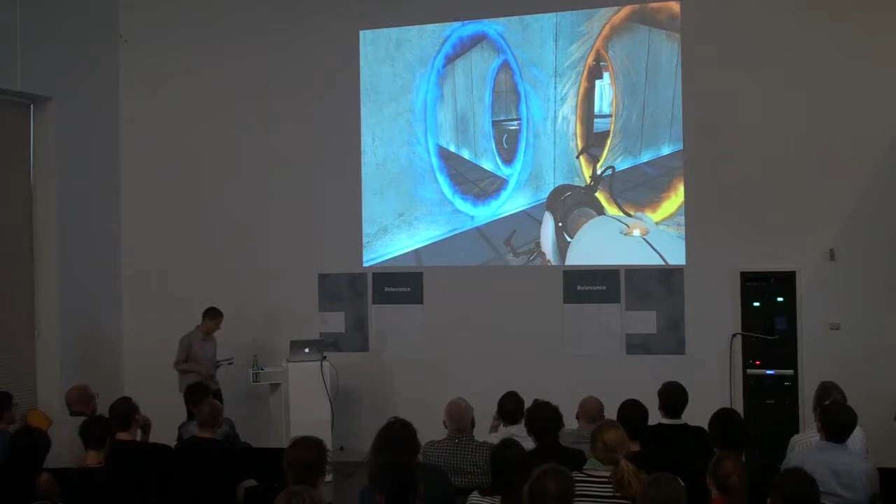An early piece that played with this possibility was developed in 2008 at the Mattress Factory. The project used William Warren's dynamic, or idea of what he termed the wormhole, as a way of thinking about spatial navigation.

So to simplify this conversation, let's say you are starting in this box here, and you are walking from this point around this long distance to this point down here. Because it takes a certain duration to move from point A to point B, you imagine there's a certain distance that your body has to travel between the two points. But if you create a kind of visual shortcut from point A to point B, you suddenly have a collapse of these relationships, where these things start to coexist in the same field.

This becomes ever more disorienting, or more complex, perhaps, when we start thinking about the relationship from what is above us to what is below.

Here we have an image of the work. When you enter the space, you see the piece embedded in the floor. And when you get closer to the piece, you start to actually feel the air that is coming from the exterior entering into the space.

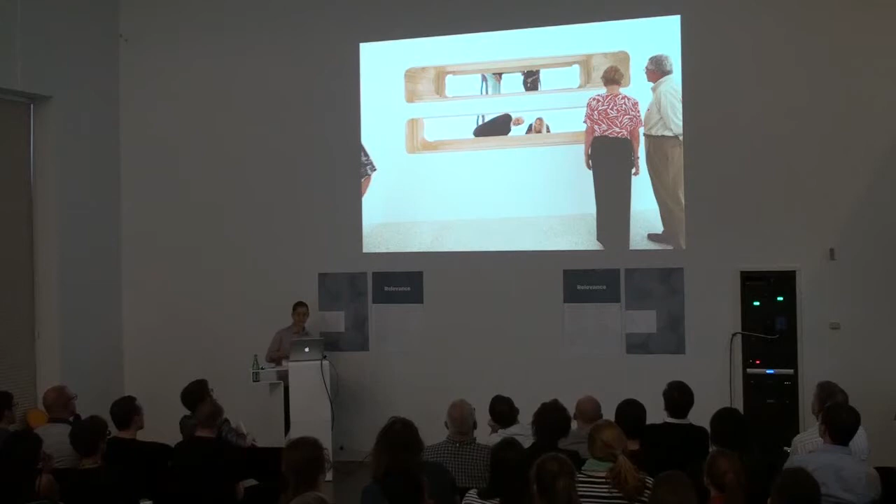But as either you, the viewer, or the object you are viewing, meaning the bodies on the far side of the wall, get closer to the boundary plane, the inversion becomes more apparent. So here you see the upper body below the lower body. And this is the work from the opposite side.

The AB condition can be expanded, or perhaps we could think of this thickness as now becoming a kind of inhabitable space, so that rather than simply looking through or across this border plane, one can now reside within it.

Here we have a project where that AB condition is transformed into an ABC condition, where now a viewer stands on one side of the boundary and on a far side of the boundary and gazes through the floor plane of a small room above, or the viewer stands and looks through reflected, across two reflected surfaces into the small space above.

Here we have the entry into the upper room, and here we have the front wall surface. Here we have the upper space, space C, looking out over a field of white walls.

And here we have the view from the ground plane, where you are standing in the space looking through the floor plane of the people above, and here you are seeing the people standing in the space above.

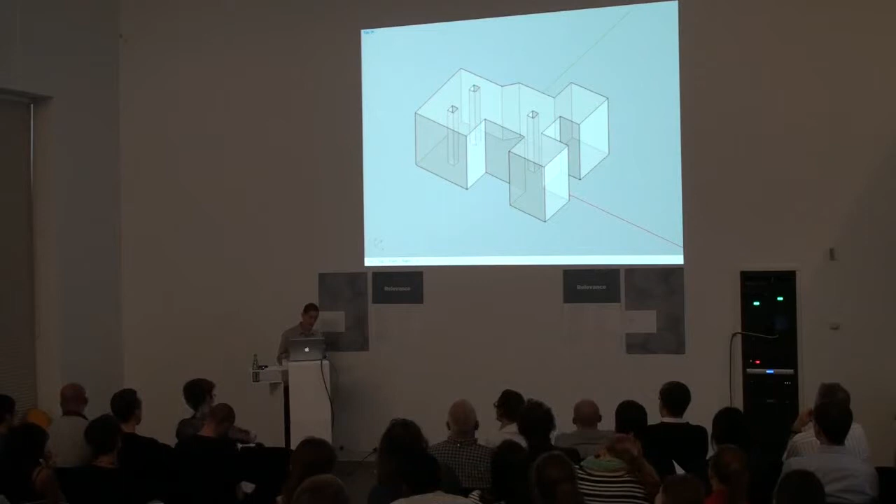So, for example, the location of a light source can be dependent on the time of day, or as in the case of the isovist, the volume of the isovist is dependent on the relationship between the total architectural volume and the position of the viewer. The software automatically updates the isovist in real time as a point is moved around the space.

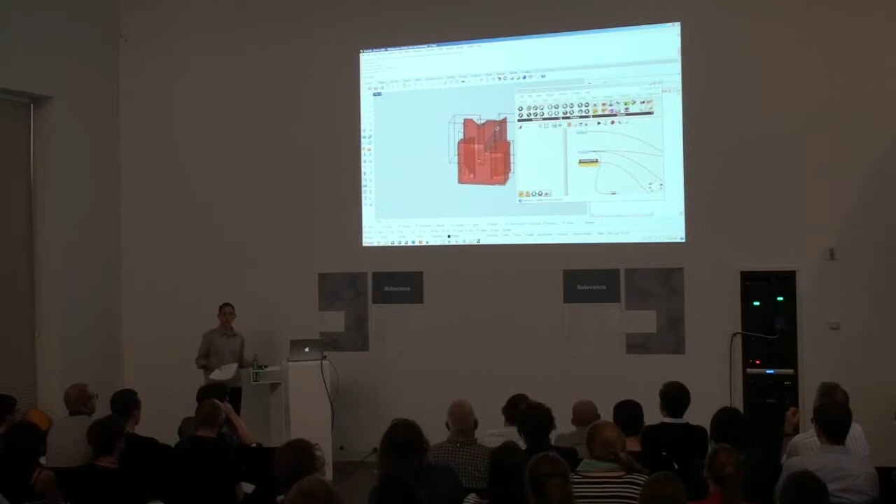Here is an example of how that works. In this very simple model, we have a fully enclosed volume where a single point represents the point of the viewer. If you input that point into the model, you can then actually generate the isovist from that given point, and observe that volumetric space. As you move that viewer around within your model space, you can start to perceive how that isovist volume would change as the viewer proceeds through the location.

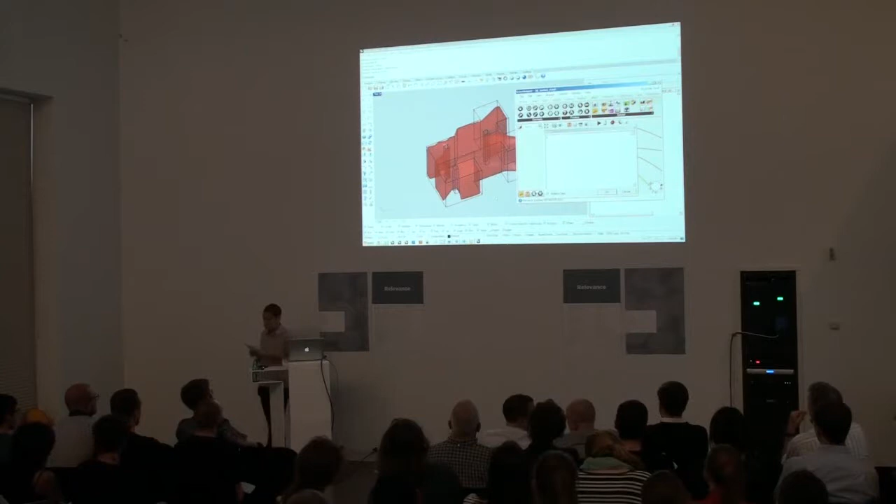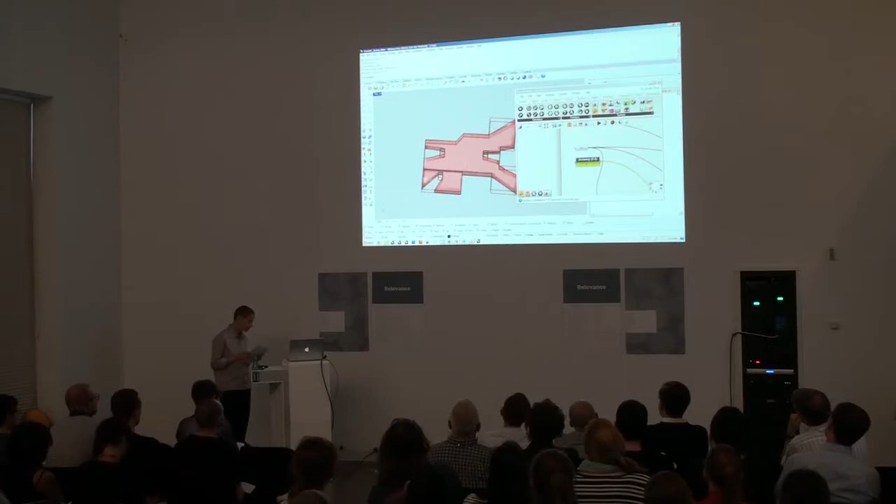The possibility of encoding perceptual cues within a parametric model recalls debates in contemporary art extending from the late 1960s to today. In 1968, two significant exhibitions, one at the Stedelijk in Amsterdam and the second at Kunsthalle Bern, argued for the centrality of site in shaping a work's form.

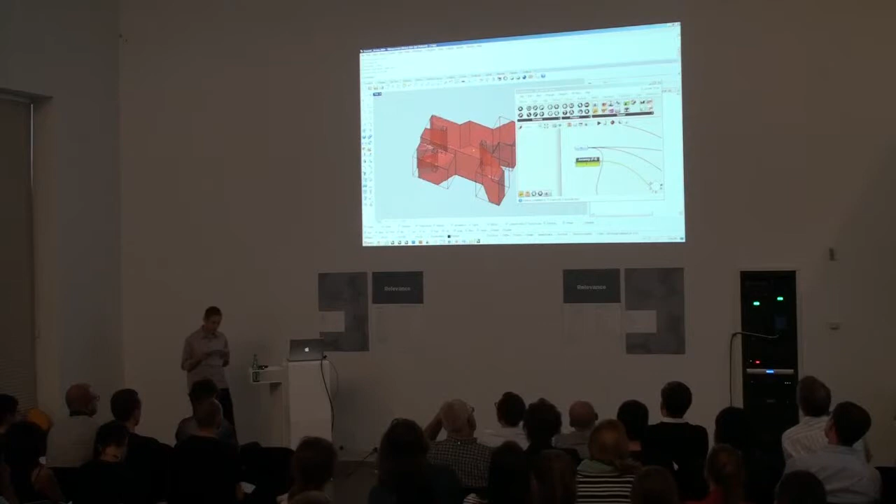Describing the work in Op Losse Schroeven at the Stedelijk, curator Wim Beeren argues that the work has changed from, quote, an artwork that dominates and determines the space to an art that takes up a certain relationship to the space, end quote. The shape and form of the works in the exhibition were dependent on context. When works were reinstalled in a new location, the form of the work was altered. Site was a non-transferable, specific set of sensible conditions that shapes an artwork's form.

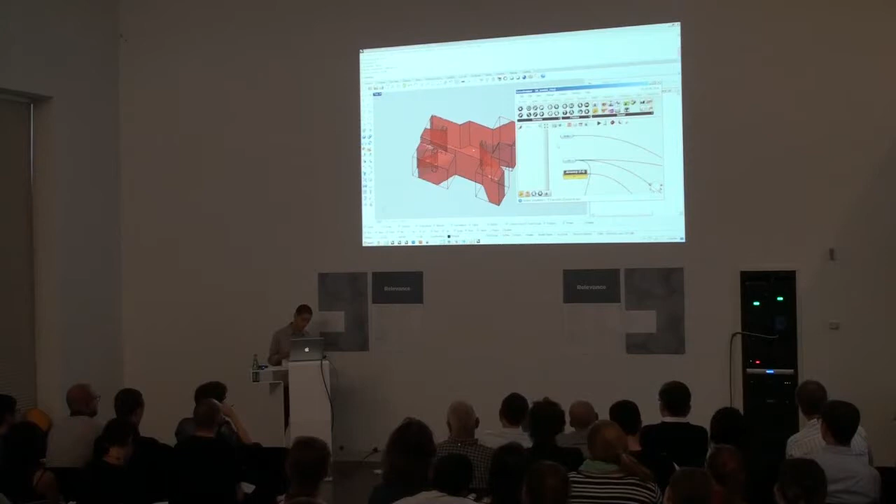Scripting universalizes these sensible conditions, assigning numerical value to a location's changing qualities. Properties of sunlight, moisture, condensation, temperature, vibration, reflection, etc. are transformed from sensible affect to quantifiable variable. This transformation actively argues against the ongoing presumption that the sensibility of sight can unmoor the artwork from predictable arrangement.

The isovist was used as a way of starting to think about how to contend with the irregularity of this location. In particular, a major challenge to the construction of, or the stability of the form of the isovist as the viewer moves through the space, was this column right here.

The resolution of this irregularity came in the form of extending the grid so that the columns were buried within the walls, or within a single new wall, and a new zone was generated. So now we have an A, B, C, D, E, F zone, and the columns are located not where one might expect them, which is at the intersection of these two walls, but in fact off-center.

This meant that the corner spaces were not filled with structural material, so those corners could be excavated or opened up, and that opening would create a kind of irregular void space.

It also became very important to understand these zones not purely in terms of what is visible and what is not visible, or the possibility of the occluding edge, but also in terms of zones of light and dark, or the color or temperature of white light.

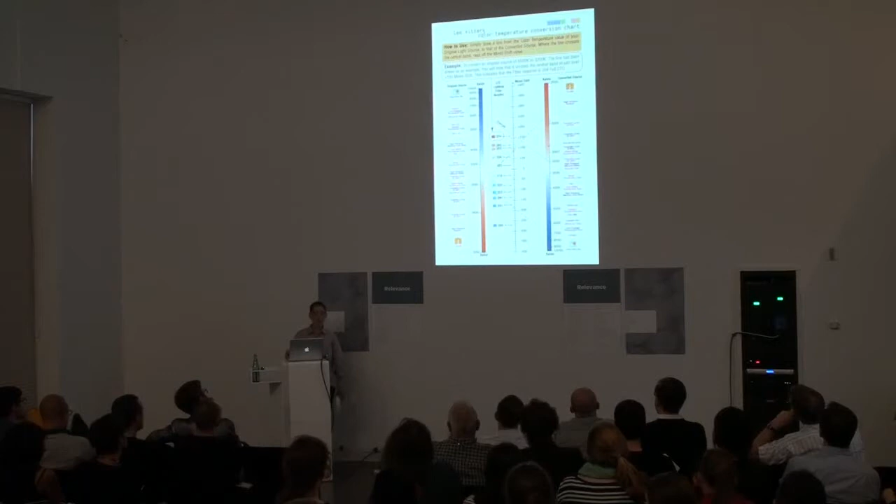In order to study the models, or the changing warm and cool white light as it passed across this model space, we did a series of tests. These tests required not a Rhino-based model or a render engine model, but an actual physical light condition where the Kelvin values were set up in various ways.

So here we have these different gels along an A, B, C, D, E, F space. And here we have a series of models where you can see we were basically moving gels around and thinking about how different warm and cool white light shifts might have a resonant effect. This is a photograph of that model.

The other important development through this process was the specific connection and thickness of the material. One very critical aspect was how to create a surface that lined the incision across the thickness of the material that was not seamless, but actually articulated the seam, while maintaining the collapse or absorption of light so that when perceived from a distance, it would appear incredibly flat, with a great reduction of depth perception.

So we developed a script that allowed for a joint based on a wood lap joint. That script started as a series of possible joint sketches, and then led to a basic parametric model that allowed for a series of variables which determine this joint system.

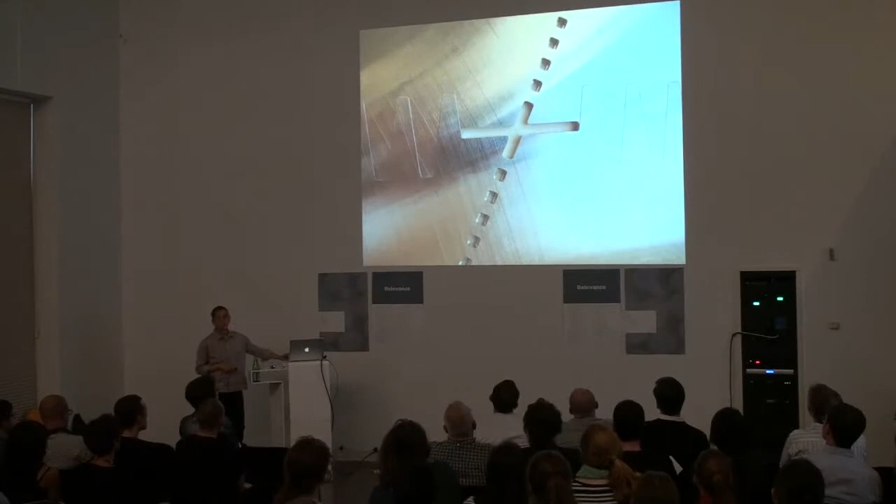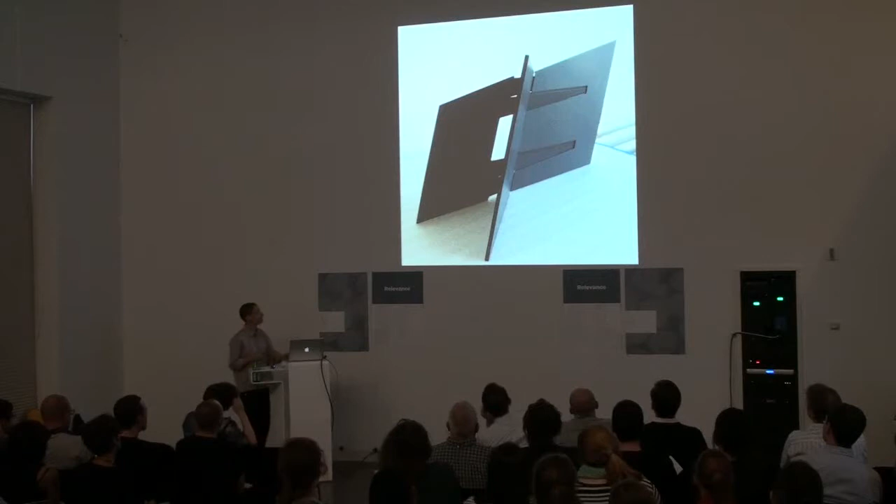This is a sample of this early version of this material. And this is another sample using the same definition. And this is a three-way joint where we have specifically a bent piece of material and an elongated tooth or lap joint across that material, creating a three-way intersection. And this is the location of that detail in the larger project.

This is the ABCD condition. You enter the space from this particular room, and what appears to be quite blue in this room and yellow in this room is actually not blue or yellow. The way the photograph was structured was that the neutral grade was set in each of these photographs to the room in which the photograph was taken. So everything is a kind of relative warmth or coolness.

This blue color is daylight. This warm color, I believe, is 4100 K. You enter the space, you walk through this threshold, looking into a storage room which has a 6,000 Kelvin value fluorescent bulb into the space to the right. You look back out the window in the far space beyond.

And here you're standing in the daylit room looking back into a fluorescent lit room, which is not actually a deep yellow, but appears yellow when you key the photograph to a color neutral. The other thing that became very important as a result of this project was the relationship of this large plane of glass to the floor, and specifically the fact that the glass floated above the floor plane and created a kind of tension between this edge and the ground plane.

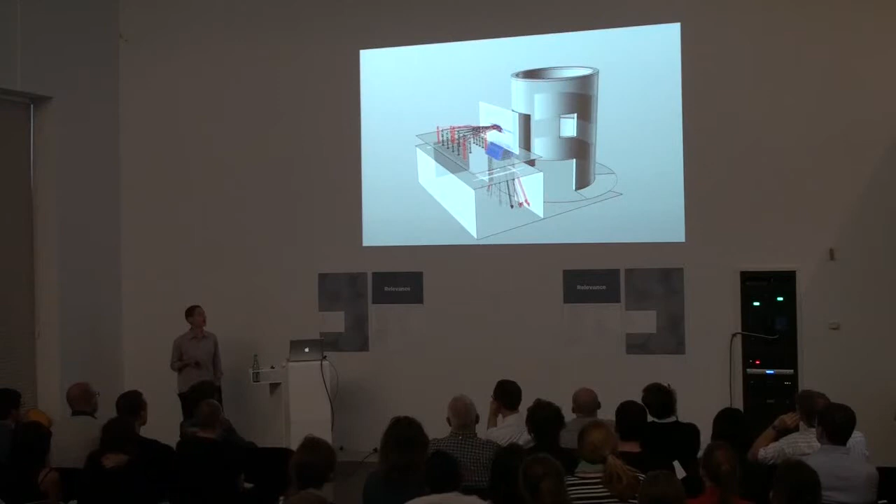In developing this work, a series of studies were done on the possibility of viewing across a reflective surface within the thickness of this wall and down through to the floor below. What you have here is a very simple diagram showing one of the great challenges of this work.

So all of these figures in red, all the sightlines in red, are viewing an obstruction. Specifically, as they look at this mirror plane, the sightlines are not actually passing through the hole in the slab, but because of the depth of that slab, they're intersecting with the walls or the thickness of the slab itself. So there's a lot of reflection of the actual structure.

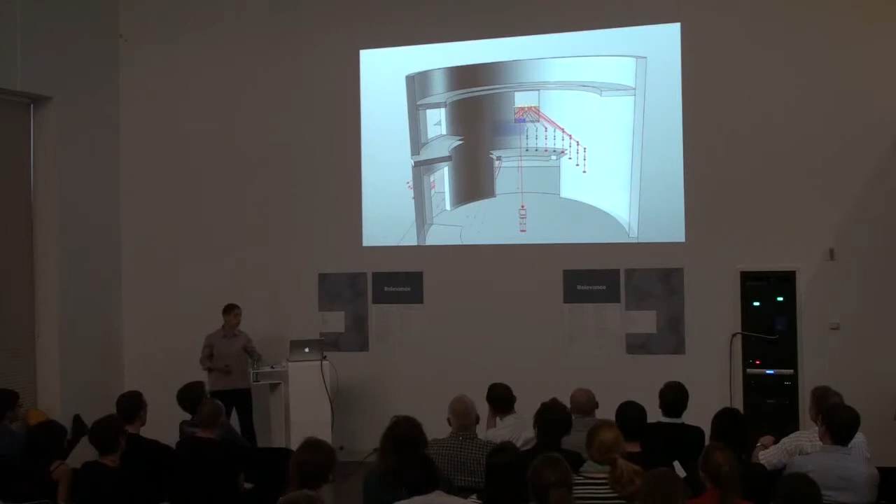This was not only true from these upper galleries, but from every viewing position. As one ascended or descended these stairs, when looking at a reflective surface, the sightlines would constantly intersect with the walls of the aperture, or the walls of the incision in the slab or wall itself.

To deal with this, we developed a kind of more complex isovist, which allowed us to think about how reflection might change the geometry of the field of vision. Here we have a very simple diagram of that—let me explain this slide for a moment.

This brown piece down here is the slab surface. These are two primary beams—there's also a kind of ghost of beams we added to the slab to reinforce around this opening. And this is this strange, funny shape that looks like a face or a head. That orange shape is the shape of the skin, the aluminum skin actually inserted inside of the wall system. This yellow shape is a reflection of the orange skin across this 45-degree mirror surface.

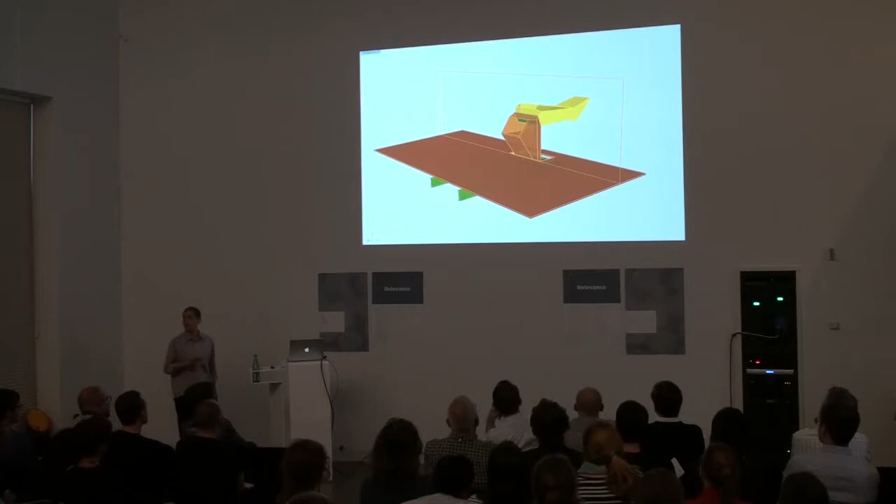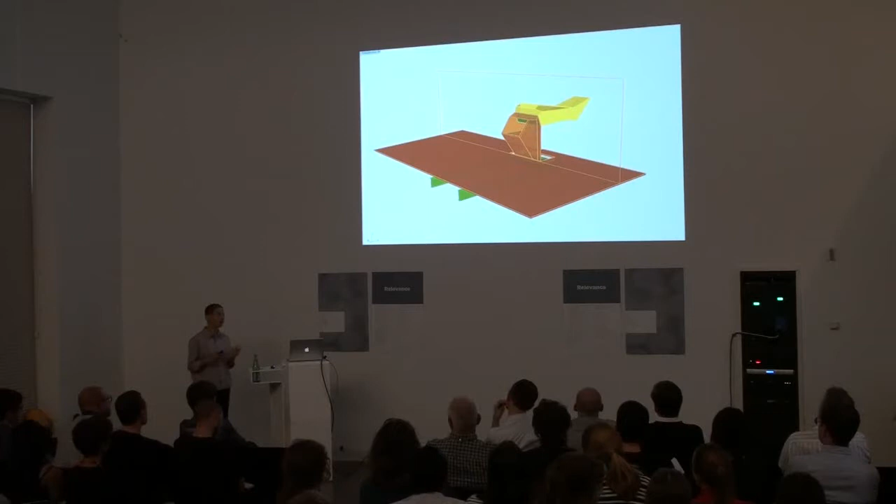The reason that was important was we needed to understand how self-reflection worked—how looking across that mirror one would start to perceive the boundary of itself. And what it meant was that we could actually choreograph the self-reflection into part of the work.

So here we have an encounter with the piece itself. As you enter from the second floor, you walk across it and there is a kind of monochromatic condition where you have all blackness throughout the entire aperture. As you move across the surface, this upper quadrant remains black, but the lower quadrant reads as dark blue—because, like the other photos, this photograph is keyed neutral to the room it was taken in, but the blue is actually daylight from the atrium space beyond.

As you continue to move across the surface, you start to see this yellow trapezoid appear far right. As you continue, it becomes a kind of simple grid structure where you have a yellow and a blue trapezoid and two black trapezoids. Importantly, the upper quadrant is entirely a reflection—this is a self-reflection, and this is a reflection through the artwork.

What's actually being viewed in the reflected surface is the view through the artwork to the floor below. Here you can see the teeth, or the joint system. It's a very different geometry than the joint system in the previous work, but it's entirely the same parametric system that has generated it.